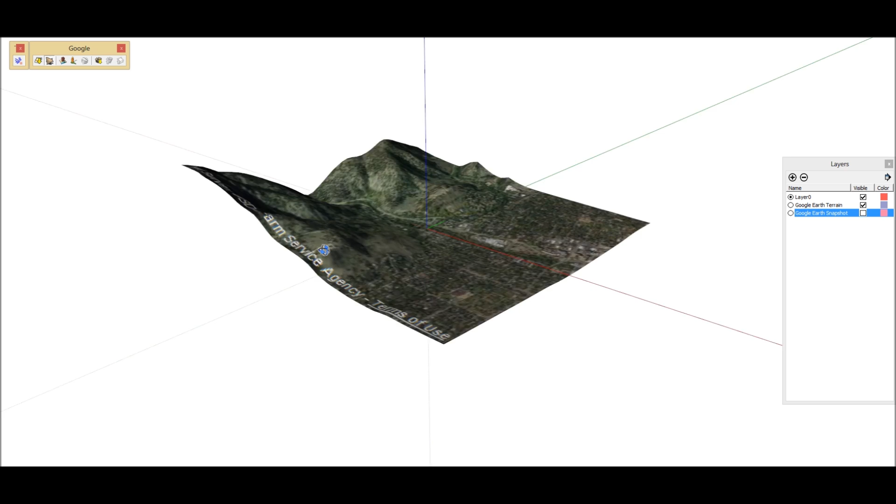So here we have an area outside Boulder. If I bring up my layers panel, turn on terrain, turn off the snapshot, you'll see it's quite smooth, but in terms of resolution, if we turn on monochrome mode and hidden geometry, you can see the resolution this mesh is generated at.

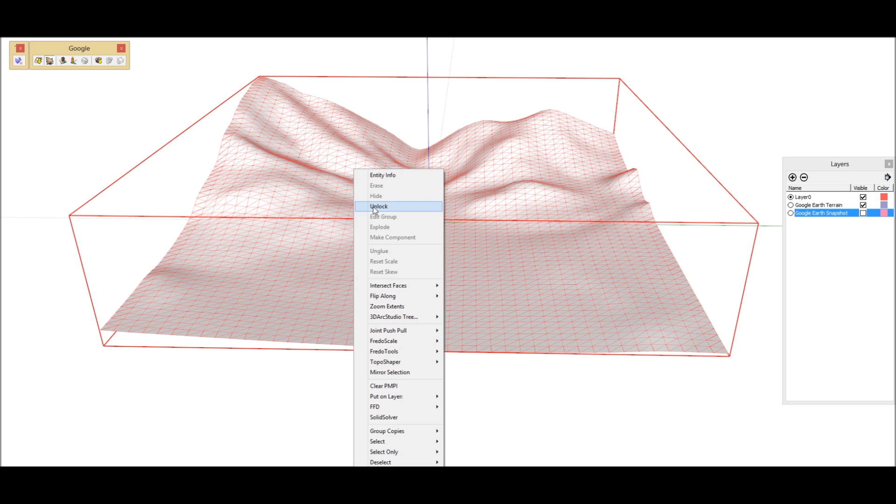And it's okay, but sometimes you're not even working with something like this. You could be working off an imported DWG contour file. So let's just generate some contours here with TIG's From Contours tool.

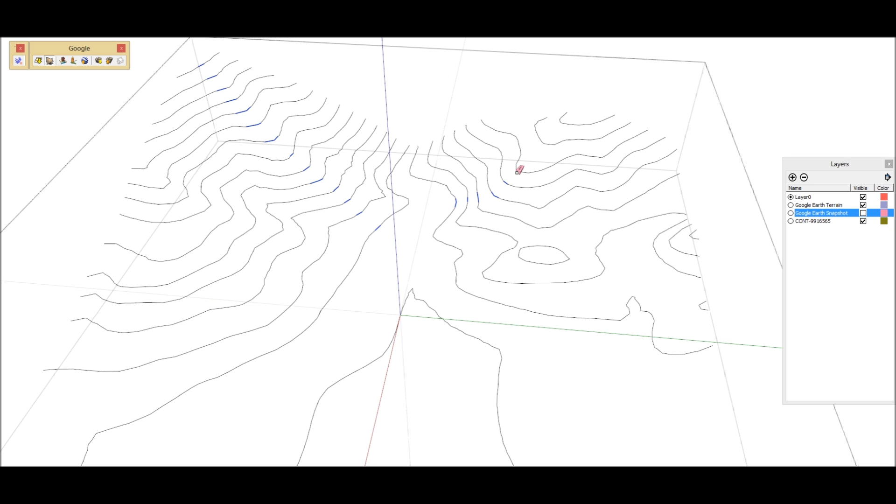Select OK. So you could be in a situation where you just have the line work, and more often than not you have areas where there's unjoined edges, all sorts of missing elements from the terrain that make life that much more difficult to resolve what's going on. You're inside doing a lot of cleanup work, trying to figure out what's what.

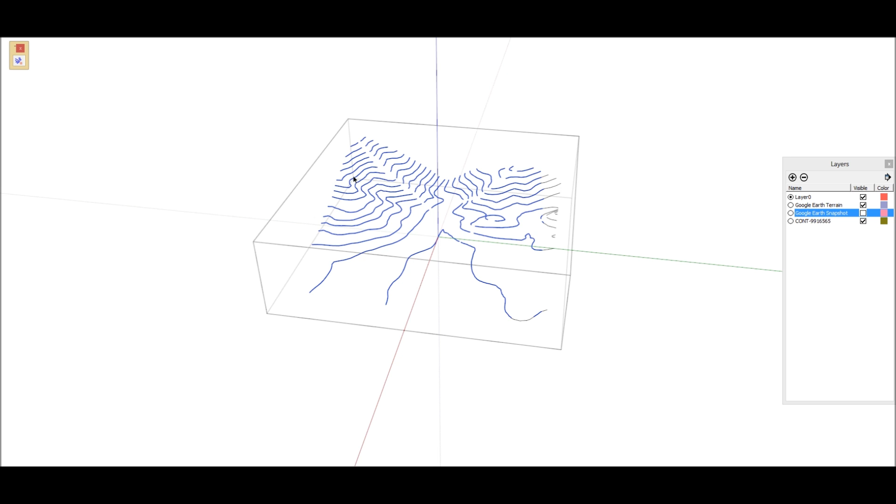So what TopoShaper will do - let's just get rid of this Google one - is based on your selection, the first thing it'll do is go into cleansing mode. So it will take a look and it'll show you straight away your view.

So here's your actual contours, and this is what TopoShaper is spitting back basically. What it's doing is looking at every edge and resolving it based on the previous edge.

So if you hover over it, it's giving you information like contour number 9, edge amount 13, Z is at 150 meters. It's giving you quite a lot of information just on hover, and all those elements that were missing from the line work have been filled in.

And if you zoom in, you can see the Fredo tool will generate a kind of junction, not just a straight line, which is something you would have done yourself. It'll use some sort of algorithm to work it out, and anything it hasn't resolved, it'll allow you to resolve by clicking and dragging.

And as you can see, it's generated a nice curve there, so you can go through your file resolving any remaining contours that you need to, just by clicking and dragging.

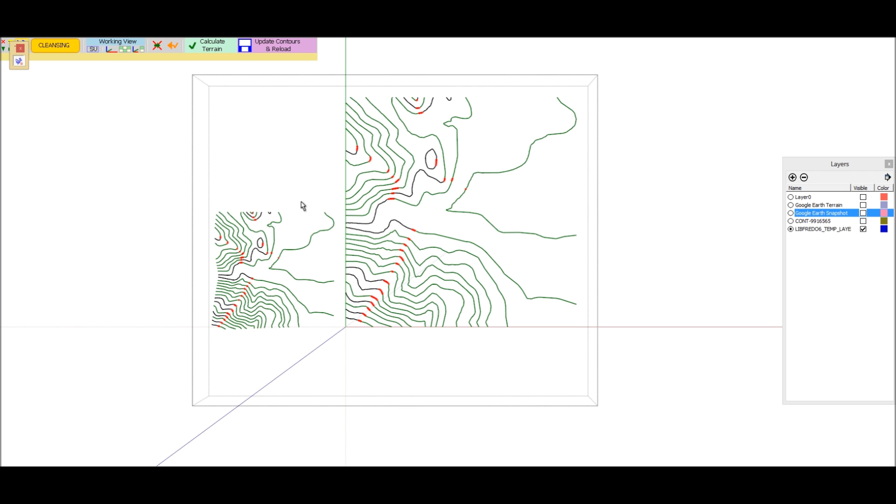Once you're happy, you're really set to go to generate the mesh. Up the top here, just move this toolbar - you have your typical Fredo commands to move this GUI wherever you want on the screen, and this will bring up the parameters for the tool.

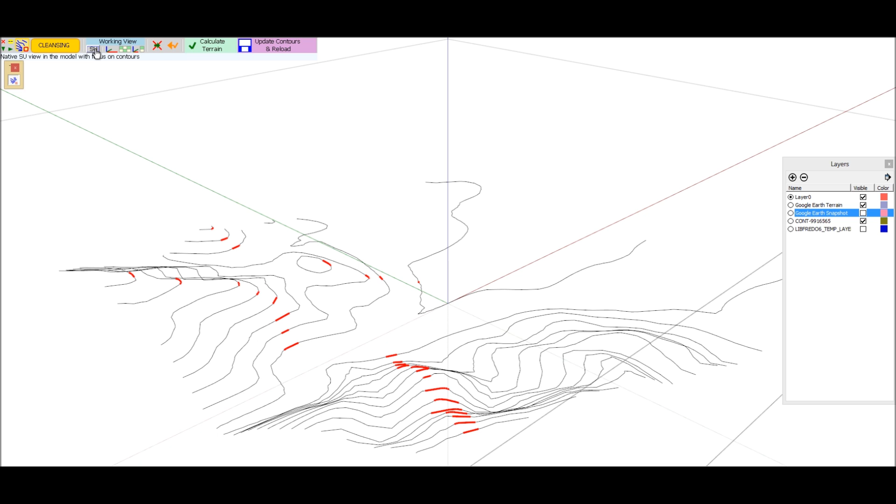Here you can toggle various view modes. So there's our raw geometry, here's both the 3D and the 2D, here's just the 2D, and here's both again. So however you want to work, it allows you to snap through various views to make sure you've captured everything. Once you're ready, you just click calculate terrain.

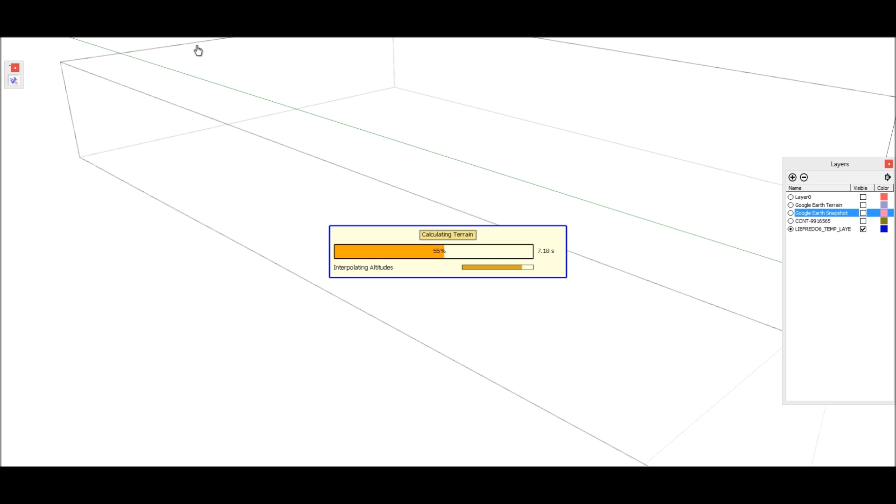And this can take a little bit of time. So there we go, and you can see what it's done. If we pop into top view here, it's taken this grid, this 50 by 50 grid - each one of these squares is 50 this way and down - and it's taken the line work and projected them onto the grid and generated this 3D mesh, as you can see here.

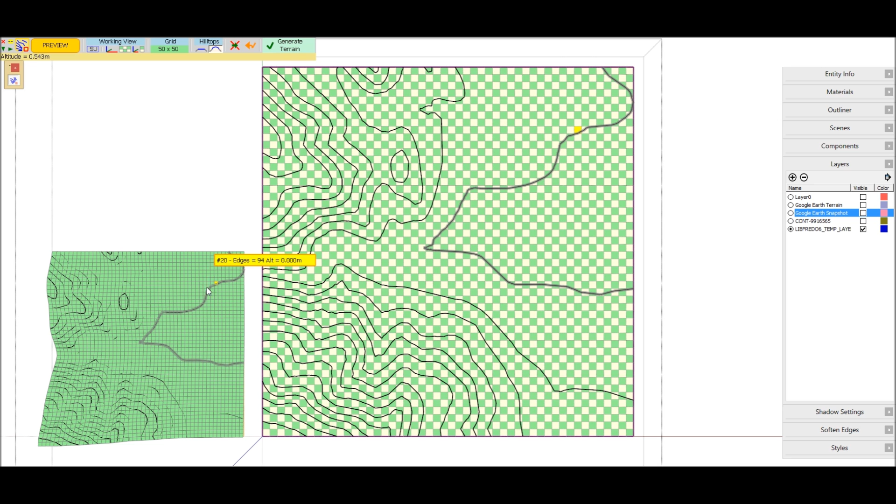You can generate whatever resolution grid you want just by typing it in here. You can also tell the tool how to generate hilltops - flat or mounds.

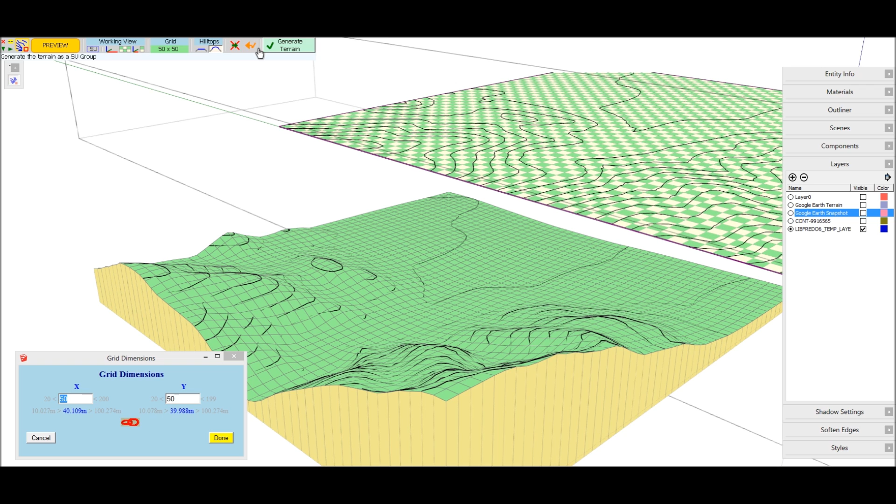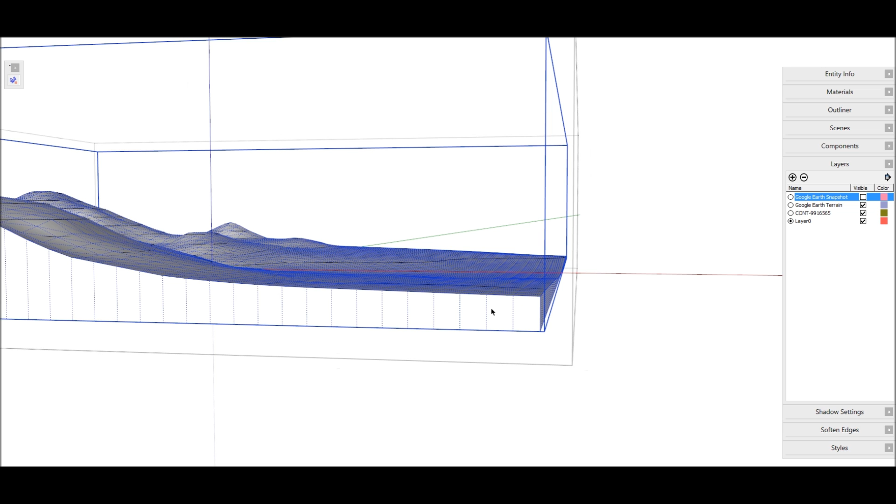And when you're ready and you're happy with the result, generate the terrain. As you can see, you get some pretty nice results. Fredo automatically inserts a nice skirt around it. This is grouped, so it's easy to move it out of the way or delete it, whatever you want to do.

And the mesh itself is pretty smooth - if you can remember the original terrain we imported, it wasn't that level of resolution. So you can imagine the types of terrains you could generate within SketchUp using this new TopoShaper tool.